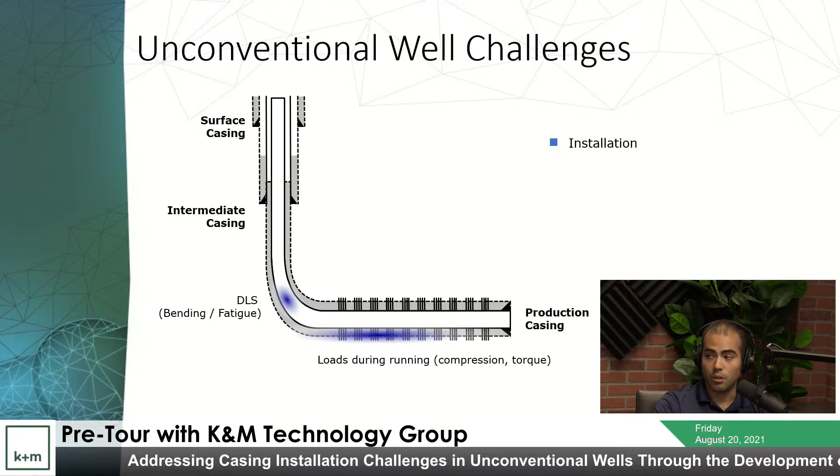As far as stimulation goes, I don't know if that's on Jorge's side. I hear clicking and stuff moving around, so I don't know which microphone is picking that up. There we go. Yep, right.

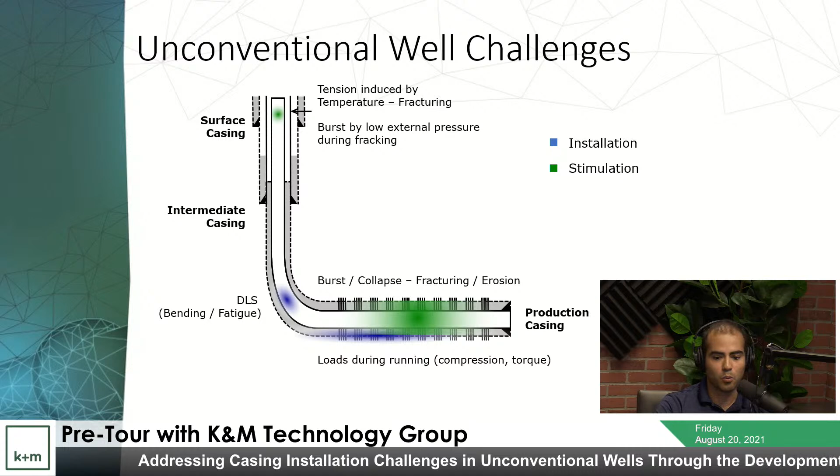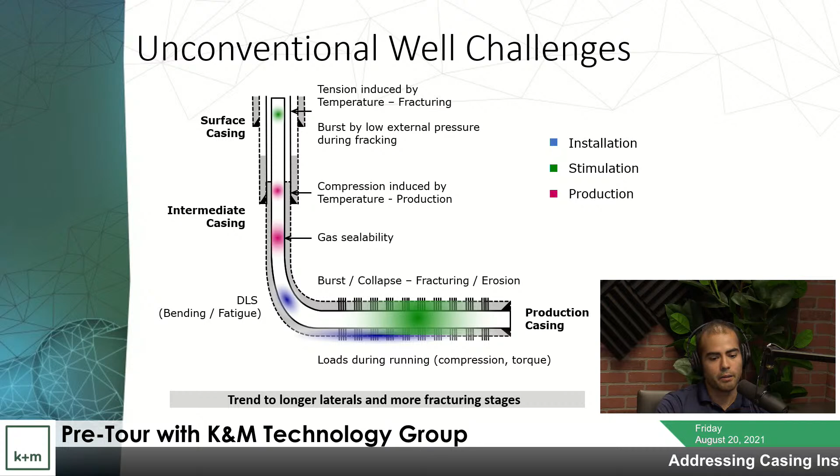During stimulation, you're dealing with various loads acting on the casing string, and as we'll see later, this is pretty demanding for the production casing. There are also other challenges specific to production. One thing that comes to mind is gas sealability as a primary concern, and this is becoming a trend in certain areas. If we think about the Rockies and what they're doing in terms of regulation and how operators are attempting to manage bradenhead pressure, we can see gas sealability is definitely a concern.

Along with all of this, you also have to deal with trends that continue to develop. One trend we're seeing, basically everybody is seeing, is the drilling of longer laterals. With longer laterals comes the need for higher torque capabilities in casing connections, an understanding of fatigue resistance if you're having to rotate to bottom, and if possible, improved fatigue resistance.

One trend we also think about is manufacturing mode-type drilling. This takes a while to explain, but for the most part it's the movement away from individual wells being drilled to pad drilling. We're seeing basically everybody, probably 90% of operators, moving towards pad drilling these cookie-cutter wells, attempting to gain efficiencies from drilling out wells on these pads using the same equipment and procedures. If we can contribute to these efficiencies, say through improved makeup times, that's something we'd like to offer the industry, and this is something we considered in developing the Wedge 400 series. And then the last point on this slide is again, sealability. It's also a trend starting to develop.

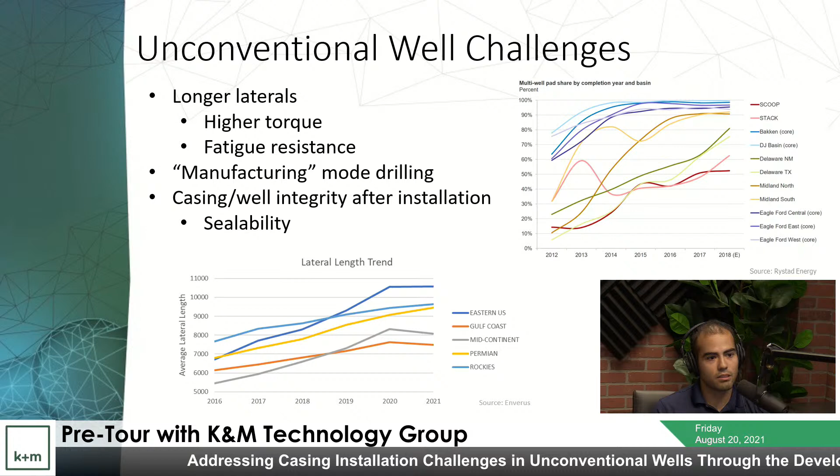It's kind of isolated to the Rockies at the moment, but we believe that in the future there's a possibility that this might start to creep into the other states of oil and gas operation.

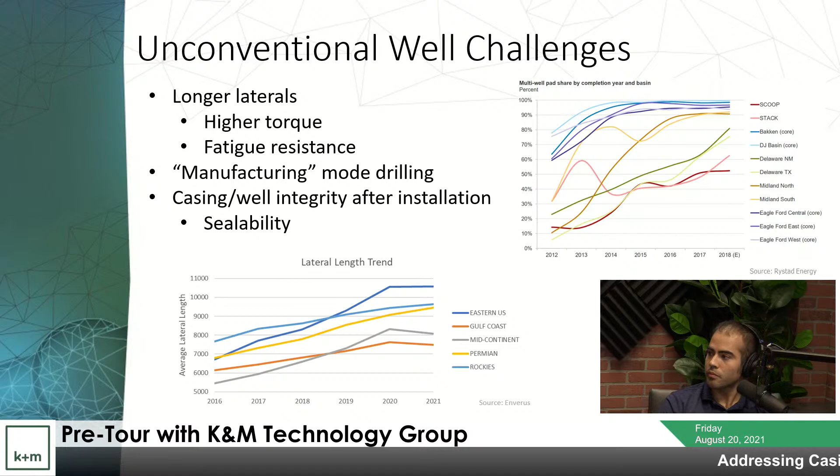Hey Lee, when you see the trend from single pad drilling to multi-pad drilling, do you also see a change in the rate or the type of casing failures that occur because of the shallow directional work?

On occasion, I would say that those are probably isolated to the initial drilling stages or period. Sure. And once they start understanding what is occurring in these areas, they kind of get a grasp of what to do in order to solve these issues.

Yeah, I think what Tim might be trying to get at is when you go from a single well pad to a multi-well pad. A single well pad, there's really no need to do any shallow directional work. You just drill straight down to your kickoff point, you build, and then you drill your lateral. And then when you start making pads, depending on the well spacing and how deep the wells are, it drives some shallow directional work just from an anti-collision standpoint.

Sure. And so even though you could have the same lateral length on the slide, you showed a couple things. You showed the move to pad drilling and then the move to longer laterals. And even with the same lateral length, when you go from straight down, building and drilling a lateral, to doing shallow directional work, that can have some severe impacts on the amount of torque required to get your casing down, and side forces and the fatigue on the casing up shallow.

So those are a couple of things that we like to take a look at when we're supporting an operator with torque and drag planning.

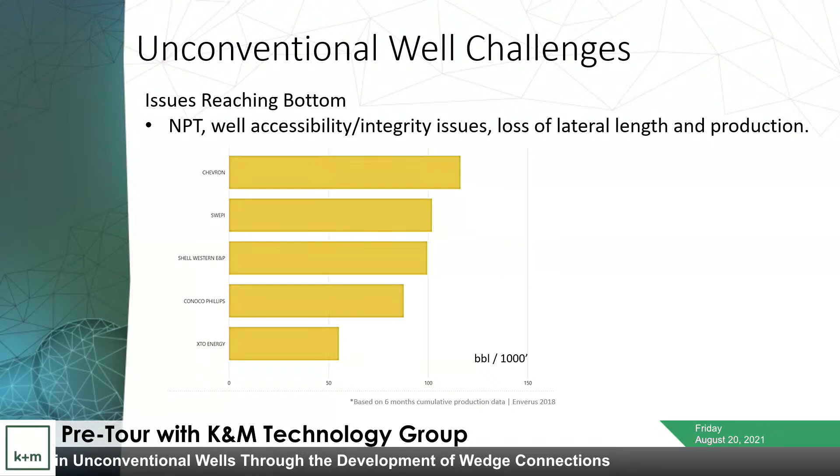Oh, one last thing I just wanted to note as far as challenges go, I think this is more of a financial challenge than anything. If you're not able to reach bottom, you're definitely going to see financial losses. If you think about how much time is spent attempting to reach bottom with casing in certain scenarios, we've seen, let's say, 6 hours, 8 hours, sometimes even 24 hours of casing being worked at in a range of like 100 to 200 feet where they're not really progressing. We consider that non-productive time.

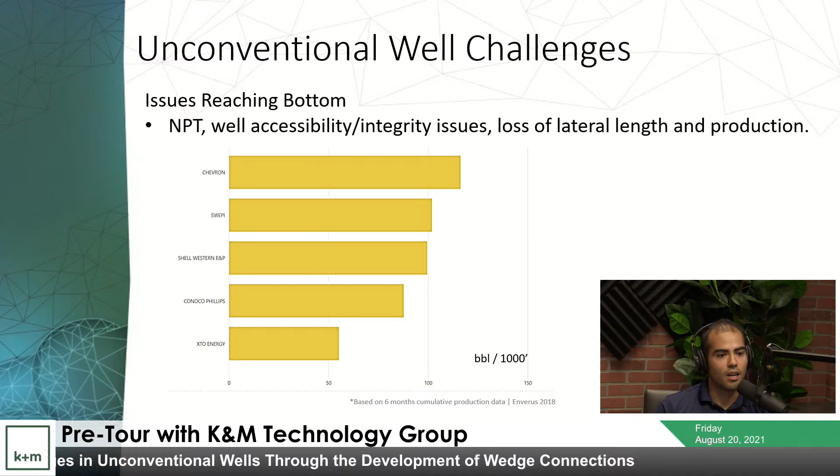You're really not making any traction, you're really not progressing with anything there. And then on top of that, if you happen to reach bottom, or let's say you call it short, if you work the casing for an extended period, you can possibly damage casing connections, and therefore have to deal with those issues later on down the road when you're attempting to complete your wells. And then finally, there's the general loss of lateral length and production that comes from having to call a well short or run short.

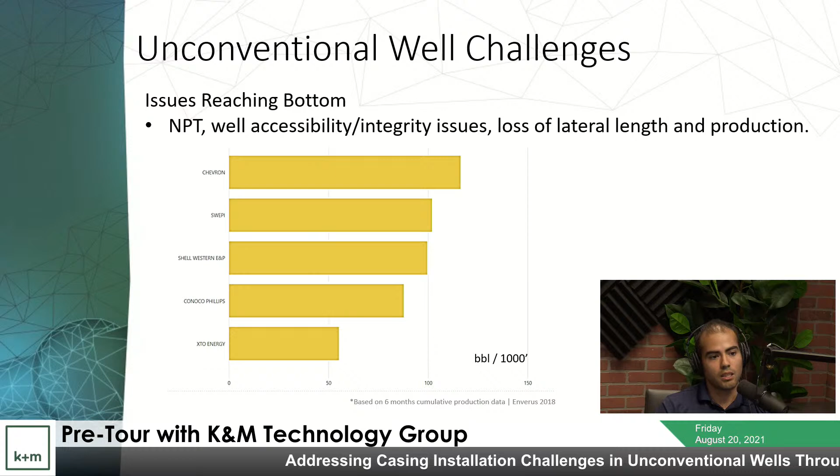We think that these are all things that need to be considered when planning and ensuring that you have enough torque to reach bottom, and just going through that planning period first to understand what to expect as you're running casing, especially the production casing in these unconventional wells.

Right, so it goes back to the whole systems design concept - it's not just getting one piece of equipment or one tubular or something, we have to look at the whole operation and be ready to take advantage of this new technology.

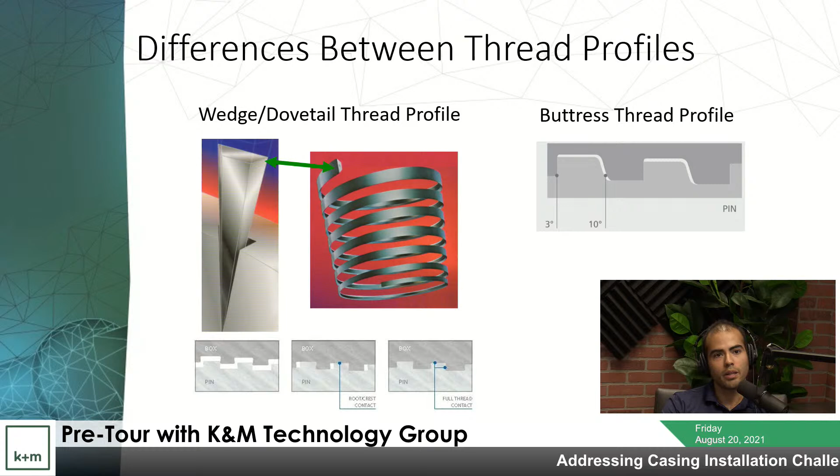Yep, and with that we can start introducing the wedge thread connection and go over the wedge thread profile, which will help us understand what these wedge connections bring to the table. Yeah, thank you Lee, I'll take up from here.

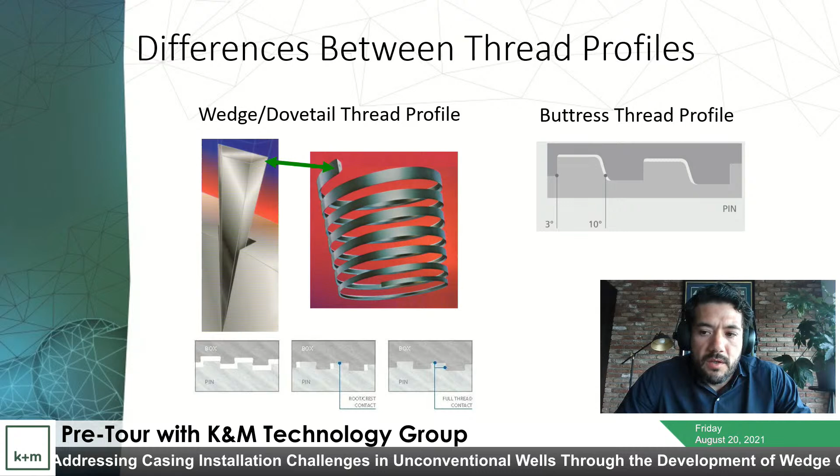Well, in this slide we can see the differences between the dovetail wedge connection and a regular buttress thread. So what we see here is a dovetail wedge shape wrapped around a steel pipe with a given taper. And the lockup mechanism of the wedge connection is as follows, shown in the lower image.

So the pin is first stabbed into the box, then we start rotating, and the first areas in contact are the roots and the crests. That's the image in the middle.

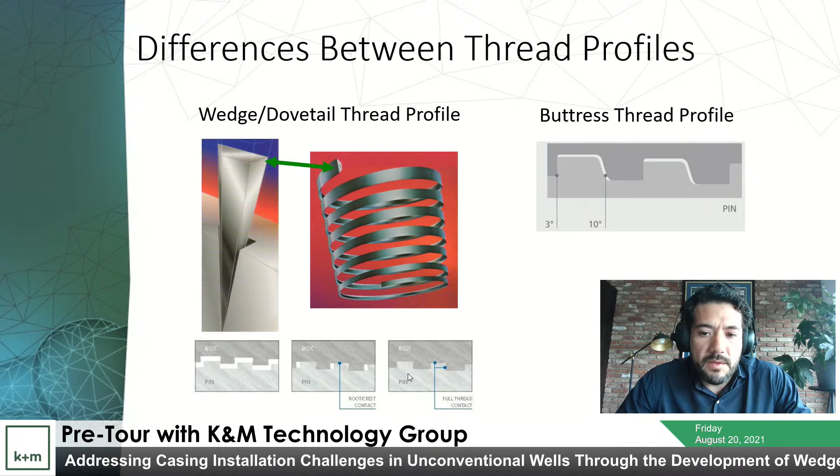Then that will increase the torque since we have to overcome some radial interference between the two pieces. Eventually with more rotation, all the gaps between the threads start to narrow and close, so we can really start to see that wedging effect.

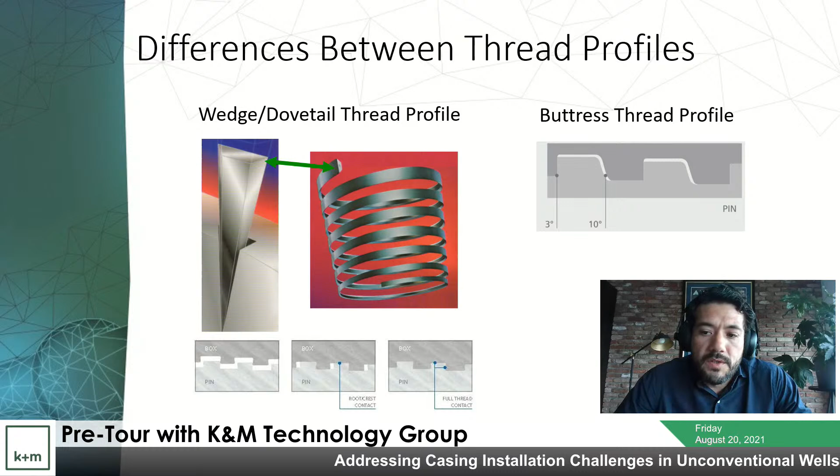It's at that moment that all the surfaces are in contact, the roots with the crests and the flanks. This final position gives the connection the ability to seal, the thread sealability, and also the resistance to torque.

From this point on, it's really hard to make the connection move any further. This is different from what happens in a regular buttress thread profile, because most of the energy stored in the connection at makeup comes mainly from radial interference, which needs to be fairly high if we want an acceptable level of sealability and torque. Regardless, there will always be gaps between the threads.

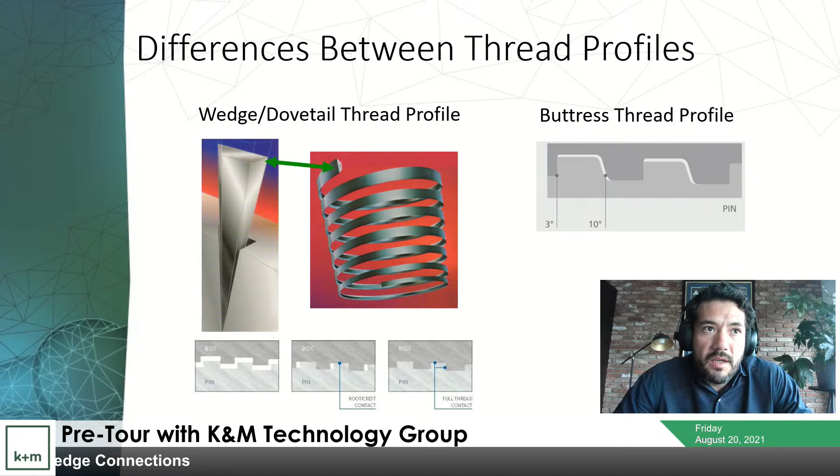In this case, the buttress, well, it's easier to rotate the connection. If you try to rotate it a little bit further, it will move, which in turn will overstress the connection, or in this case, the coupling radially.

So this is basically, you can see from a side profile, it's got the dovetail, and then it's a wedge also. So this would be the pin, this would be the box. You can see that when you start making it up, there's a lot of play. Then as you continue to push it in, eventually it locks up and you're getting full contact across there. That's what the slides were showing.

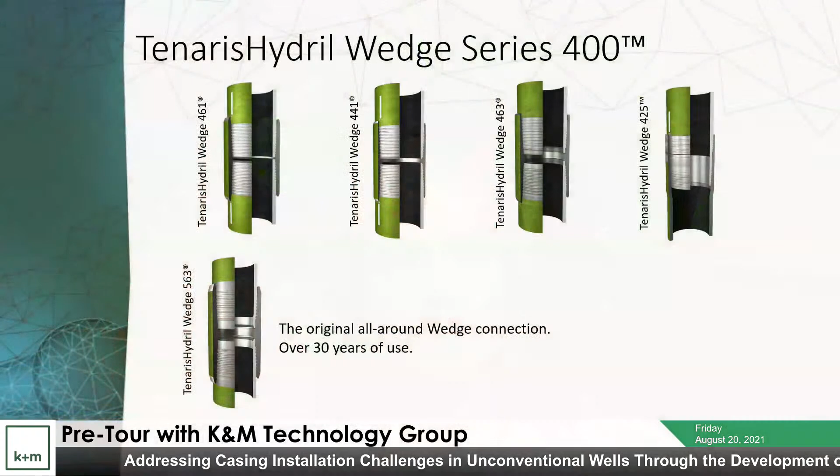All right, now we can start detailing the Wedge 400 series here. We have four connections that were recently introduced to the market, starting with the first connection of this family being the Wedge 461, and this is your standard all-purpose wedge connection.

It's being used all across the U.S. nowadays since it's been introduced. It does not have a metal-to-metal seal. It's a full-size coupling. The interesting thing with this particular connection is that as you are making it up, you are going to engage the wedge threads in order to achieve a significant level of torque.

As you are installing casing and reaching the operating torque of the connection, you can see an engagement of the pins come in contact, and this is just an additional mechanism to allow for additional torque abilities for this particular connection. We also introduced the Wedge 441, which is very similar to the 461.

The thing that makes this particular connection different is that we developed a coupling that is extremely slim. In fact, the OD of this coupling is comparable to our wedge integral semi-flush connections. So when you see this connection up close and personal, you can see that the coupling is barely above the OD of the pipe body.

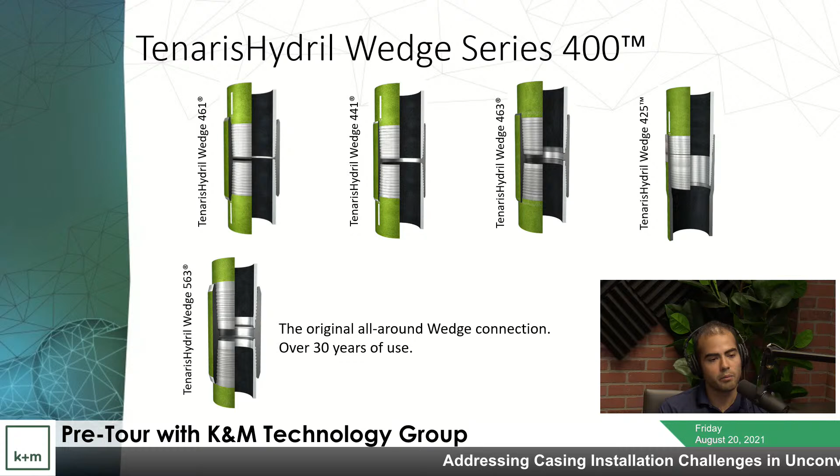So from a client standpoint, is the advantage cost or production time or what? A little bit of both. In terms of costs, we like to think that we are passing along some of these costs that we gain in terms of efficiencies.

But we find that having a coupling, you also gain other benefits. Typically, when you compare the fatigue resistance of various connections, threaded and coupled connections tend to have the higher fatigue resistance in comparison to the other extreme being a flush connection. And you have some flexibility too, that if you damage or misthread the coupling, you can just get another coupling.

Sure, and not have to trash that entire joint. So, okay, sure, exactly, yeah.

The other thing as well is that the straightening belt in the middle helps to control the hoop stresses that happen at the very beginning of the thread, which also helps to improve the sealability of such a really thin box.

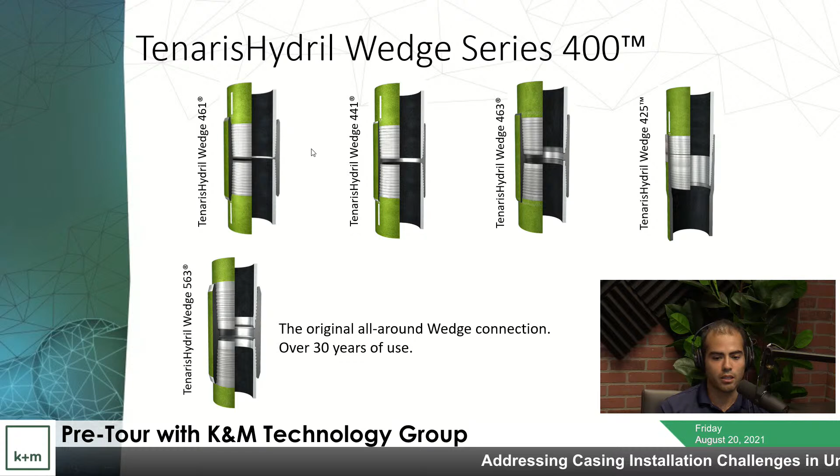And then we have the 463 connection. It's comparable to the 461, except that we've added a metal-to-metal seal, in order to provide gas-tight sealability to a very high level. This connection also has a shoulder that you can engage with at higher torque levels. And then we have the 425, which is an integral two-step wedge connection with a metal-to-metal seal at the center of the connection.

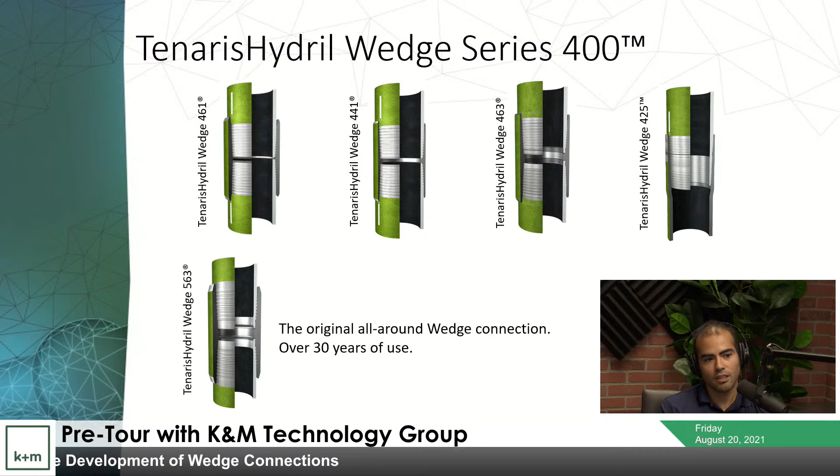And all of these connections, you can kind of pull at their roots and find that they all used some form of technology from the original Wedge 500 series connections, especially the Wedge 563, which is probably the connection that most people are familiar with if they've used Wedge connections. It's been around for a significant amount of time, used all across the world for all kinds of applications, including unconventionals. In fact, we have some operators that are still familiar with it and haven't migrated over to one of these 400 series connections, because they understand that the 563 is a pretty good connection, and sometimes it's difficult to fix something that isn't broken.

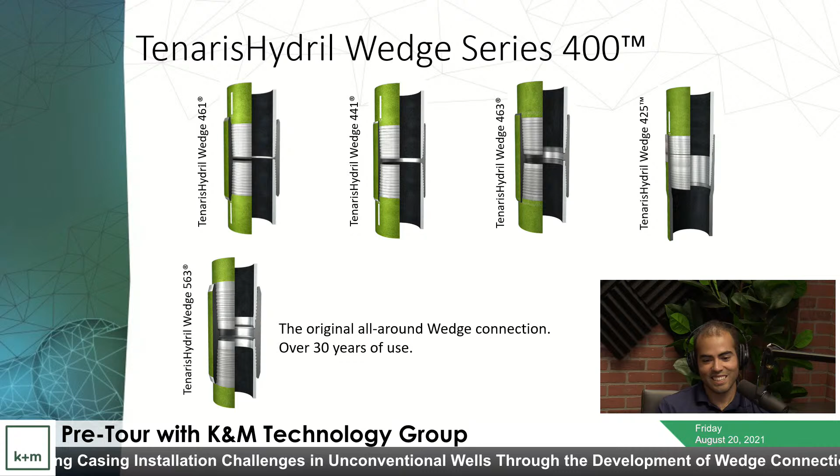Let's talk about the naming structure for a minute, because back when it used to be simple, it used to be pretty simple. Keep it on this slide for a minute, because I just want to point out the different numbers.

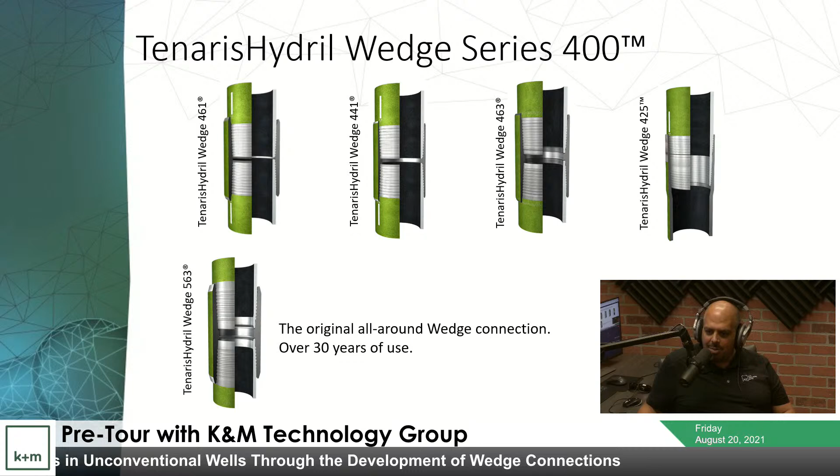So there are three different numbers after 'wedge.' It used to be that 5 signified that it was a wedge thread, 6 was threaded and coupled, 3 was semi-flush, and 1 was flush. And then there was either a 3 or a 1 at the end, with 3 being gas tight and 1 not being gas tight. So it was a pretty simple naming structure.

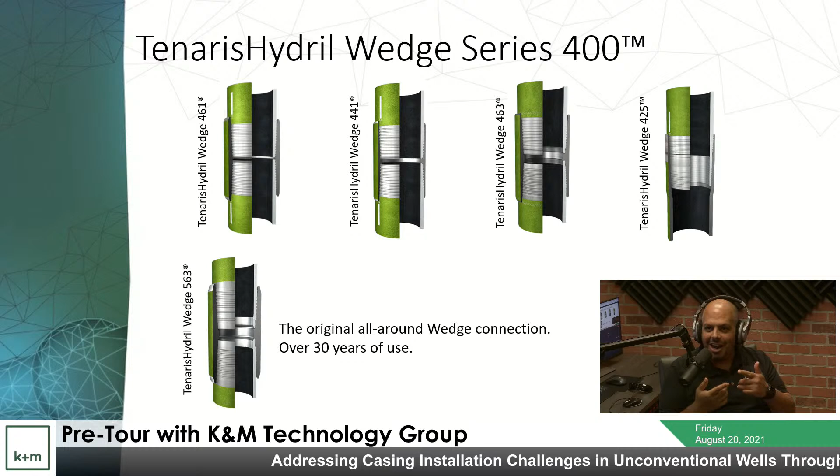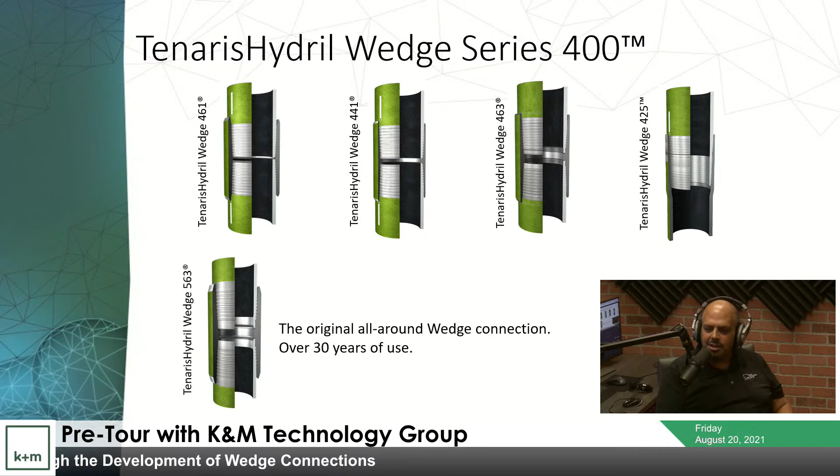Sure, now I get confused because it's not just the 5 anymore. I believe you have the 6 series also. Yes, now you have the 4 series, and then 6, 4, 2, which didn't exist before. And also there's 1, 3, and now a 5 also, which didn't exist before. So can you just walk us through the naming? Sure, maybe Jorge wants to take this one.

The naming, like you said, in the 500 series was pretty simple. After the 500 series, we deployed the 600 series that really didn't follow the same nomenclature, let's say.

For instance, 6 is the number of the series. The 1 is still flush, the 2 is a semi-flush connection. And then, because we added features, we kind of started coming up with new numbers and new nomenclatures, but it really didn't track back to the original S500 nomenclature.

Now for series 400, we try to go back to that. So 4 is a semi-premium series mainly for unconventionals. Then the digit in the middle is close to what would be in the Series 500, so 6 is for thread and coupled connections.

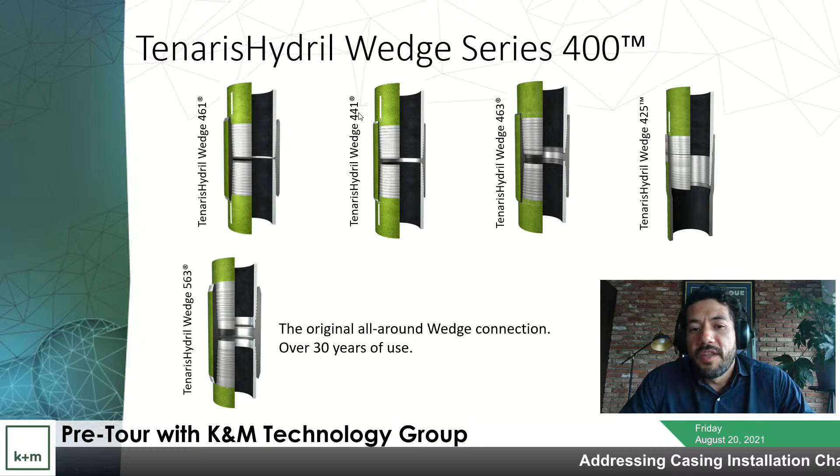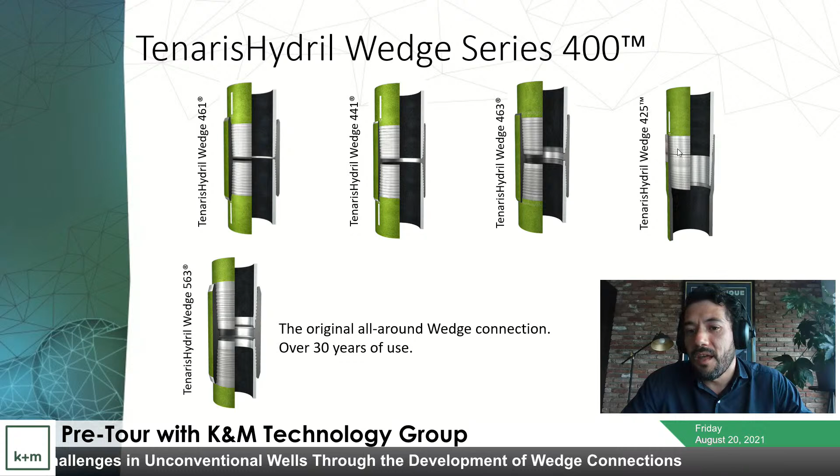Now, in this case, the 2 is for an integral connection, and the 4 is for a thread and coupled but slim line or slim coupling connection. The digit at the end is 1 for non-gas tight or without a metal-to-metal seal, and 3 is for a metal-to-metal seal. Whereas with the 5, it's a connection that has 2 steps with a seal in the middle—that's also gas tight, but the seal is found in the middle between the two wedge steps.

Okay, all right, are these all similar in terms of makeup time and makeup complexity? In terms of makeup time, I would say that these connections were designed with the intent of minimizing the amount of time required to make up a connection.

In fact, we've measured the amount of time it takes to make up these connections and compared them against our own buttress-compatible semi-premium connection, TXP, and we found that these connections are saving a significant amount of time on the rig floor. If you think about the trend towards longer laterals, you're having to make up more pipe, spending more time making up casing, and if you can minimize that time, I think it's pretty important.

So between the different types of connections, are they close in makeup time, or are certain ones faster or slower than others? I would say the threaded and coupled ones are pretty close to each other, with the 425 being a little different. But you still get a pretty good deep stab with the connection, and we try to minimize the amount of turns until final makeup.

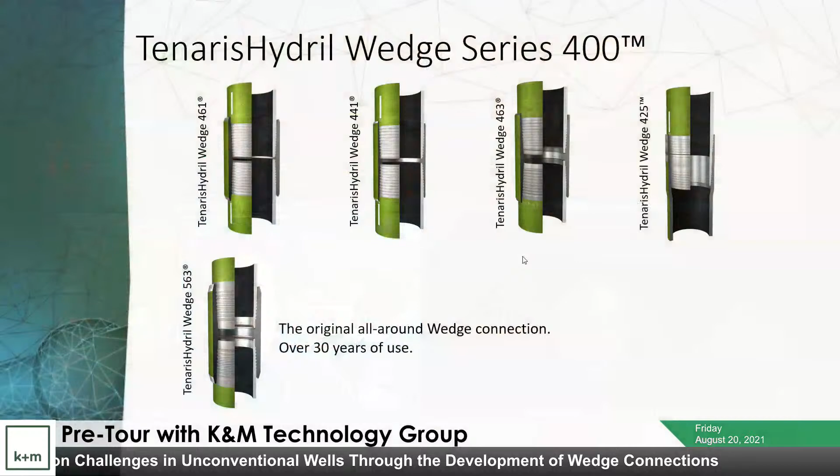So if you don't necessarily need a metal-to-metal seal, but you would like to have as much torque to work with, the 461 is an awesome connection for that.

One thing I don't know if Jorge misspoke or if I misunderstood, but I'm almost positive he described the 400 series as a semi-premium connection.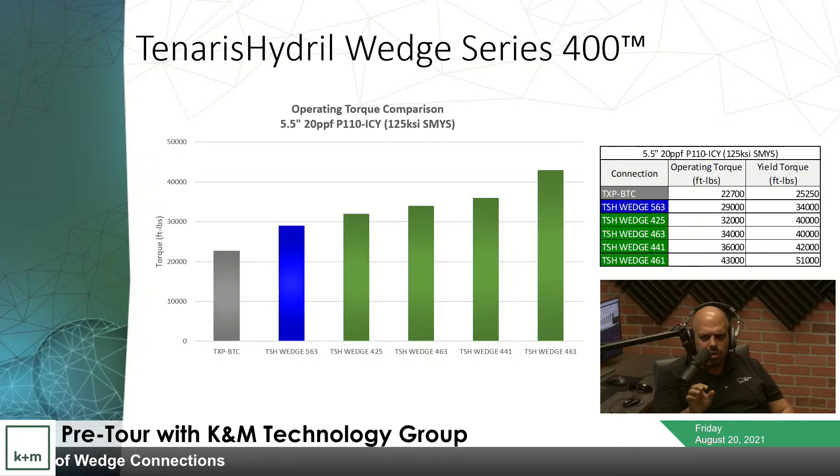We don't necessarily want to compare it to premium connections like what you're seeing in the 600 series. The 600 series introduces a significant amount of connection technology which maintains that premium tag. These connections are also premium in that you have a significant departure from what would be considered semi-premium in the oil and gas industry, which typically highlights only buttress-compatible connections.

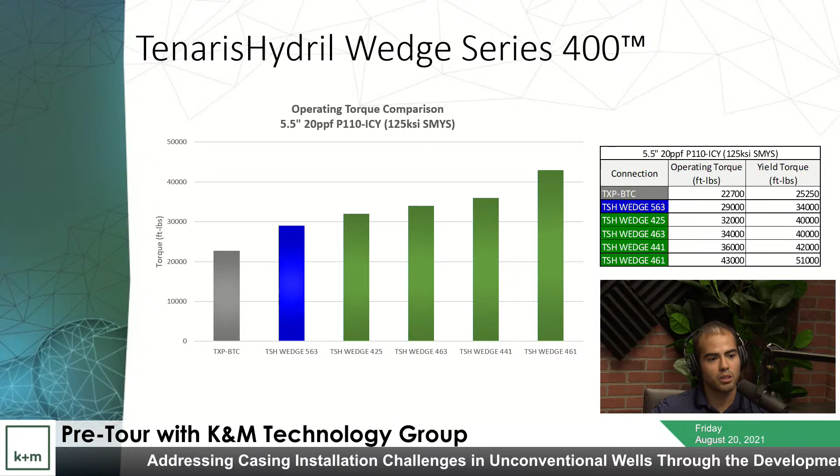But these connections kind of play along that line of premium, semi-premium, although you have a premium thread profile and premium metal-to-metal seals. We don't want to compare these against our 600 series, which again has all this additional technology testing that goes into it. So it's kind of a gray area, I would say, more than anything.

The 563 was like the Lamborghini of connections for a really long time.

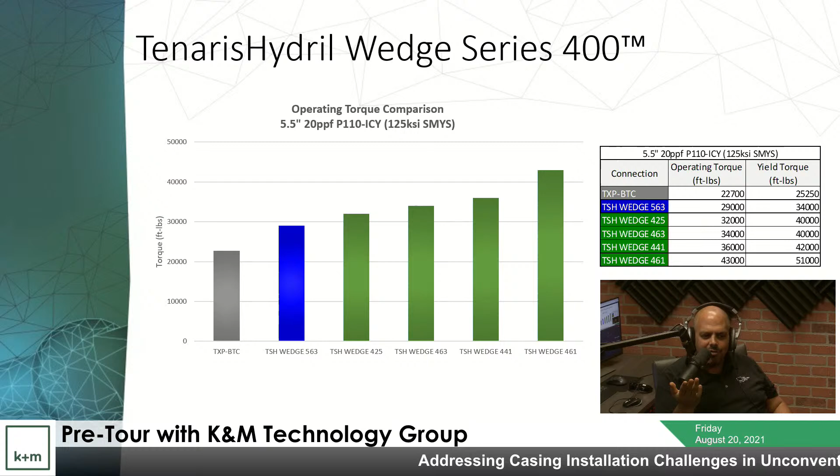So is the 563 now in Tenaris's eye a semi-premium connection? No, it's still a premium connection. It's still a flagship connection. It's still recognized. I don't want to say we don't advertise it as much anymore, but it's still recognized all around the world as a premier connection.

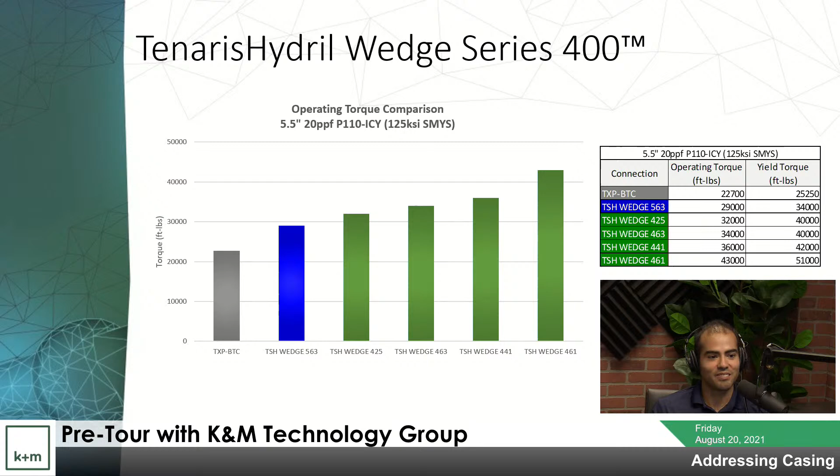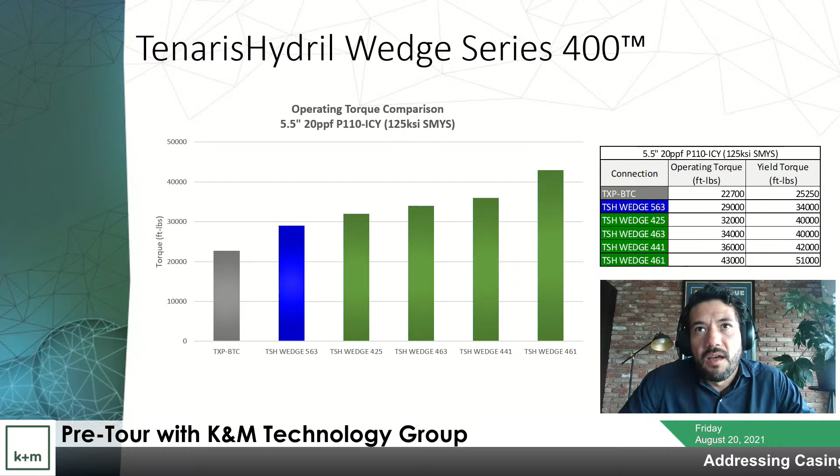Let me step in here. The 500 series is a really, really good connection, and you have to remember this connection was born, if I'm not wrong, like 1986. So it was very good. It proved to be very good, and it has thread profile features and sealability characteristics that make it a premium connection compared to the 400 series.

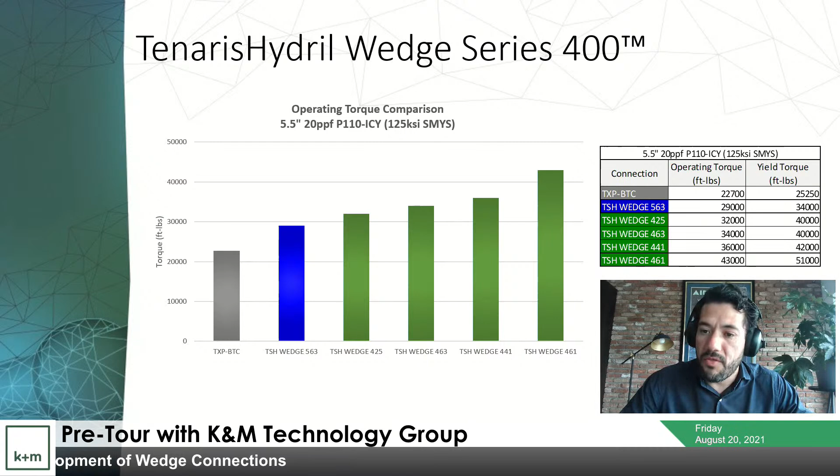One might consider comparing 563 versus 463. There are reasons why we cannot go further in torque with the 563 because we would compromise sealability, whereas with the 463 we can. But there are other things that are better in the 563 compared to the 463, and of course the manufacturing time and all these things already built into the connection would be very hard to replicate.

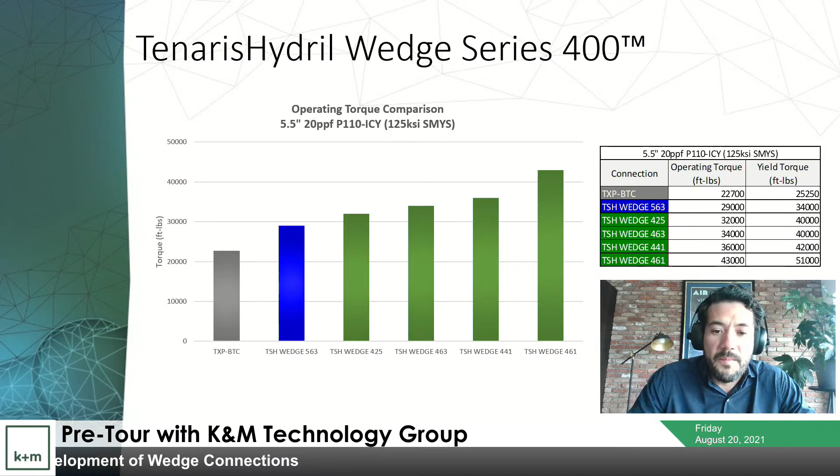Just out of curiosity, how long did it take from the time somebody at Tenaris said, let's make a new connection, until you are in full production mode? Wow, that's a tough question. I would say it really depends, but somewhere between 4 to 6 months, probably, maybe more, 8 months.

It takes some time really, I'm going to go through it a little bit more in detail, but it's a process, and there's a lot of interaction, especially for a company like ours that is pretty big in terms of manufacturing capabilities, and it involves a lot of logistics.

Just to give you an example, we only design the wedge connections in Houston. From there, all the manufacturing is done in Mexico, and the testing sometimes is done in Mexico, Argentina, or Italy, depending on the testing capacities we have in each location. So as you can imagine, making a piece of metal travel from one country to another is complicated.

So yeah, it really changes. Do all the wedge connections have the dovetail as an integral part, because you can have a wedge without a dovetail? So do all of them include a dovetail? Yes, our connections do. There are some other connections from other players that have the wedge effect, but with different profiles, not necessarily a dovetail.

So here I'm going to go through a little bit of the design process. For us, the design process starts with the input we gather from our technical department and their conversations with the operators and their requirements. Saying it another way, it's where they spot there is a gap between what they need and what is available to fulfill those needs.

With that input, we go straight to the drawing board and start working on several concepts. In the conceptual design phase, we start with a blank pipe. Let's say we only define the size, the wall thickness, and the steel grade. From there, we start mixing profiles, the shapes, the tapers, the thread lengths, and all the other features, seals, if they have seals. Then we do all the geometrical and mechanical verifications to make sure the structural integrity of the joint will comply with what was established at the beginning.

To do that, we use the finite element method. That is what you see on the screen. Basically, that is a mathematical approximation to assess the mechanical behavior of a structure subjected to working loads, whatever those loads are. It is a methodology widely used in all major industries, really from anything, from aerospace to toys. It's everything. And of course, oil and gas is not the exception. So what we evaluate with finite element analysis is axial loads, pressure loads, torque loads, and all the combinations between them, and how the connection responds to that.

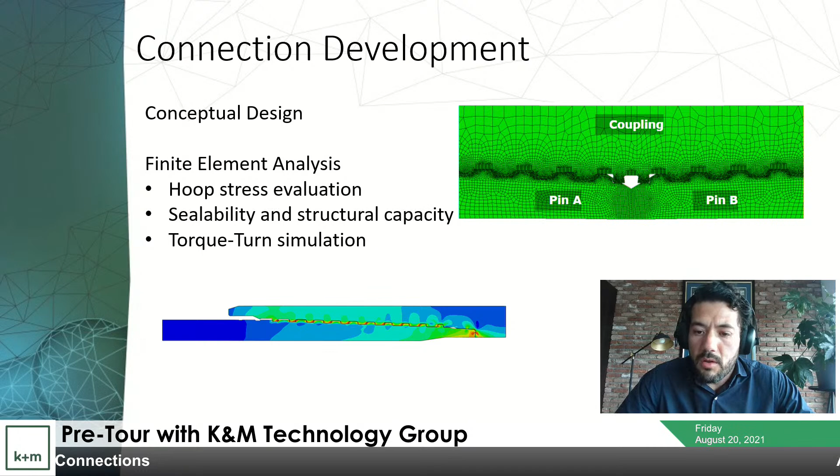But for instance, we also evaluate hoop stresses. Hoop stress is certainly a concern, because especially in environments where low to moderate concentrations of acidic gases may play a role, it could cause cracking, like hydrogen sulfide.

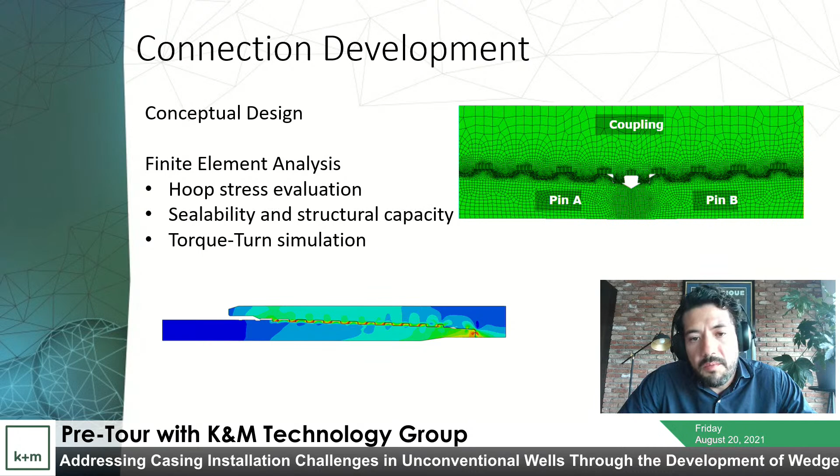So once we finish with all the mechanical computing work and all the design is optimized both geometrically and mechanically, we move on to the physical full-scale testing part.

Here is an example of what is a test for non-conventional connections. There is not a standard protocol for testing connections used in the shales, like there is, for example, in conventional plays, or for those familiar with the API 5C5 standard. So we came up with our own protocol in an attempt to simulate the actual conditions under which the connection will be used, and also trying to mimic the sequence of those conditions.

This full scale testing that you're seeing here is again a Wedge 461, 5.5, 23 pounds, P110. The first two portions are installation loads. We start first with side A of the connection, made up to reproduce the conditions of assembly in the mill. Then side B, we do that to reproduce the conditions of assembly in the field. We also change the doping conditions between side A and side B, basically to account for the differences between the manufacturing process inside the mill and the manual doping procedures in the field.

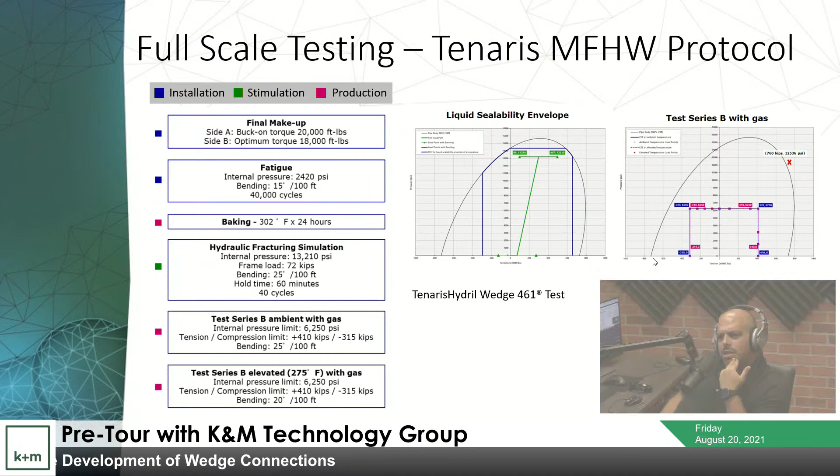How often are these tests conducted? Is it once during the development of the connection, or once per lot, or once per order?

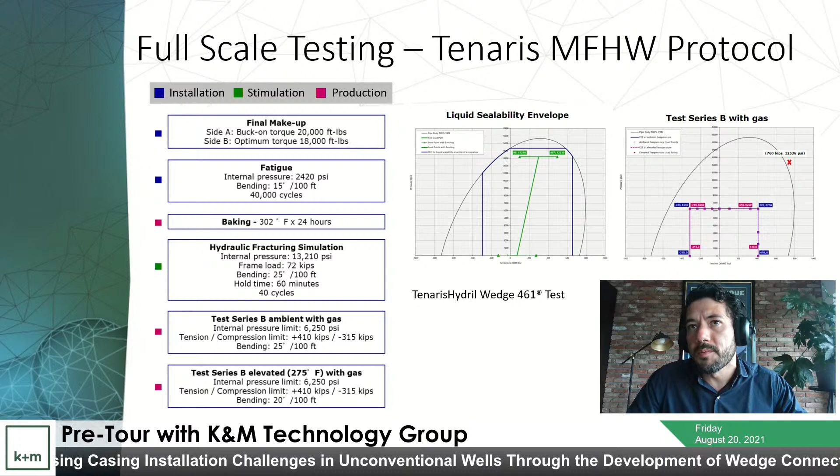No, during the development phase we definitely test them and validate. And that's also an important part you mentioned: these connections are designed in families, or ranges of families. For instance, a 5.5 461 will be completely interchangeable between a 5.5 17 pounds per foot up to a 5.5 26 pounds per foot.

So what we evaluate is, because resources are limited, we want to validate what is mostly used. In this case, we would test the 5.5 20 and the 5.5 23, and from there extrapolate to the other sizes. We do the same for 4.5, which is also interchangeable within a certain range, and for 6 and 7 the same. So to answer your question, we do that only during the development phase.

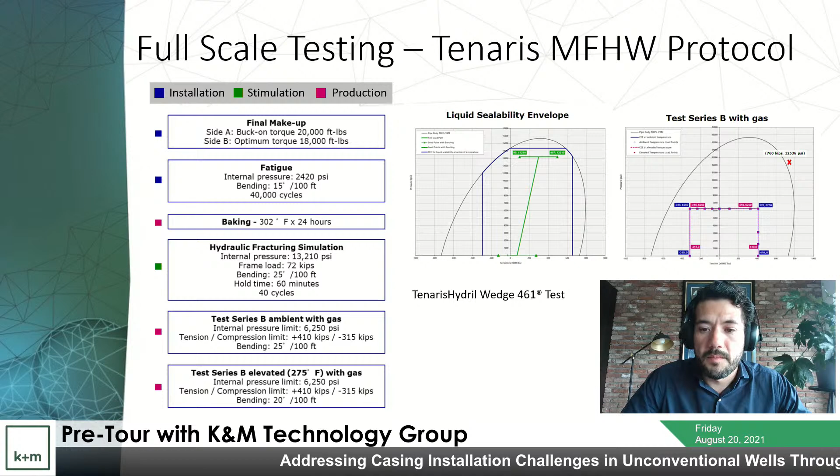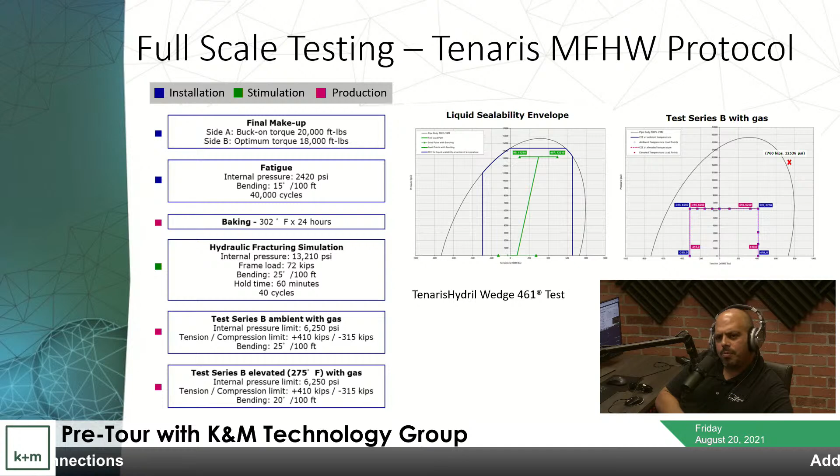On the hydraulic fracturing side, where it says 40 cycles, if you assume 200 feet between stages, 40 cycles would be an 8,000 foot lateral, which right now is pretty common to go up to 10,000 or even above. So if an operator is drilling 10,000 foot or longer laterals and wants to test it to more than 40 cycles, say 60 or 80 cycles, what would that entail?

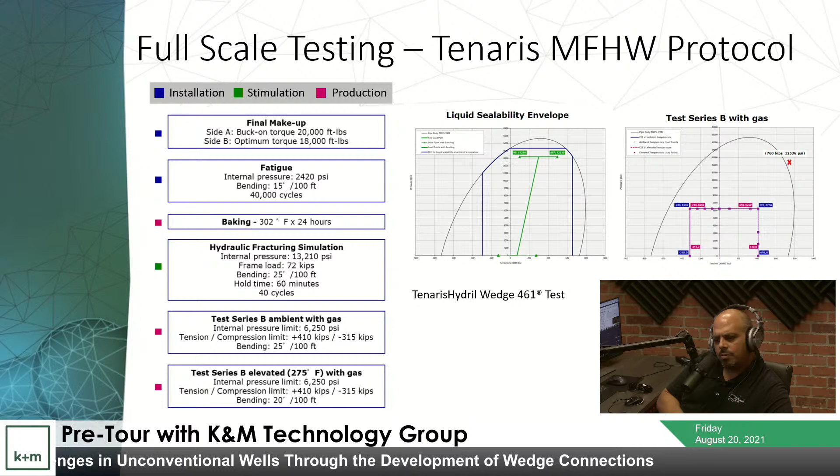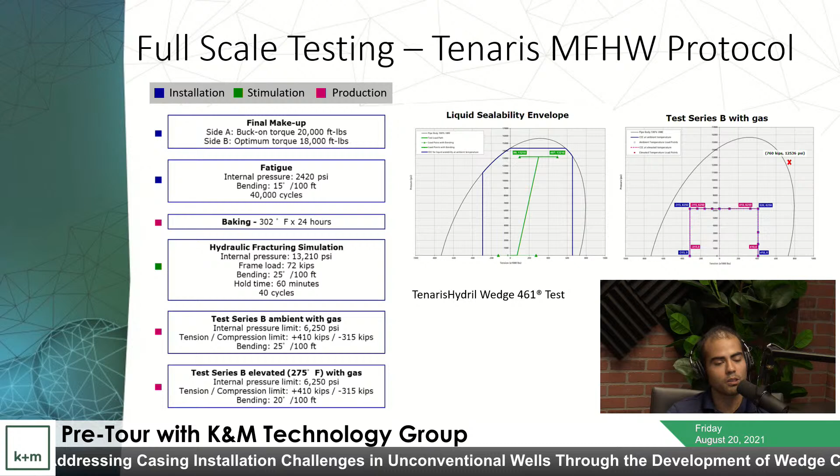This would start an internal discussion to determine whether there is an opportunity for Tenaris in testing the connection. There have been occasions where an operator requested testing specific to their application, and at the end of the day it's just a matter of who's going to pay for that testing. As Jorge commented, these tests are sometimes difficult to schedule with everything going on, so we typically plan which connections will be tested in the following budget year, and it's difficult to just squeeze something in.

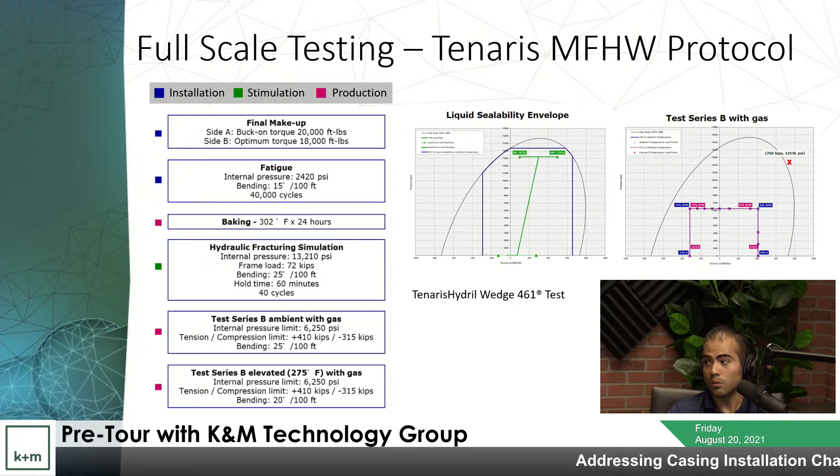But if there's an opportunity there, and we can come to an agreement with the operator, we'll go ahead and test it to whatever requirements they're asking us to.

Another important part of the connection validation is fatigue testing. To give a brief overview, fatigue can be thought of as the modification of mechanical properties due to repeated stresses or cycles of loads.

With this test, we want to study how the nucleation of cracks occurs, whether it's due to manufacturing defects or stress concentrators we haven't seen during the design phase. We also study how that crack propagates and how much time it takes to propagate until failure, which we can see as a through-wall crack in the pipe.

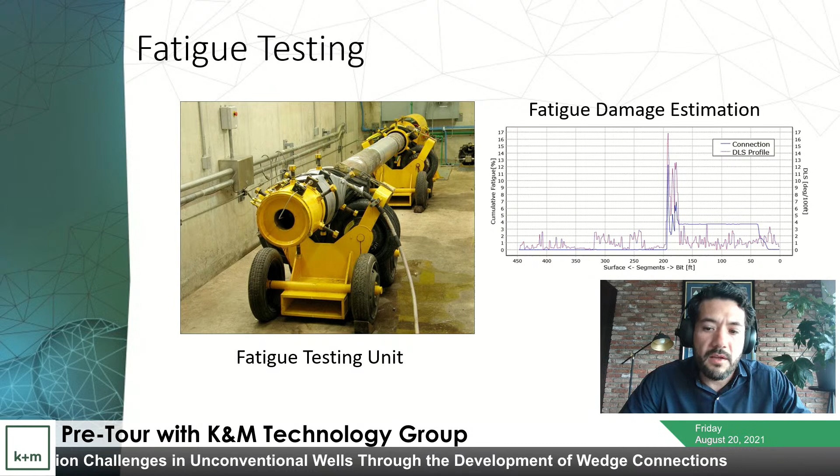Most importantly, what we can extract from these tests is a graphical representation of the connection's response to cyclic loading, what we call the SN curve. This curve allows us to correlate the level of cyclic stress to the number of cycles we would expect a connection to withstand before failing.

This is particularly important if we're doing a well design, or if we want to select a connection based on certain given conditions that an operator may have in their wells. It also feeds models of torque and drag and fatigue analysis, to make sure we will always be on the safe side.

Doing this evaluation in the lab is very important, and it's especially nice because everything is clean and tidy, and you can measure and control. But nothing compares to, and nothing beats, reality. In our case, that reality is the Rig Direct Academy, a facility we have access to in Mexico.

What we do there is go to the mill, since it's right there, and take stock connections coming directly from the mill to test them under various conditions. We use tongs, we use CRTs, we change the doping conditions, we use drilling mud as a lubricant instead of dope, we use low and high RPM, or misalignments, or any kind of test we want to do. The images on the slide, for instance, were conditions requested by a customer, but these are not situations we would advise in actual field operations.

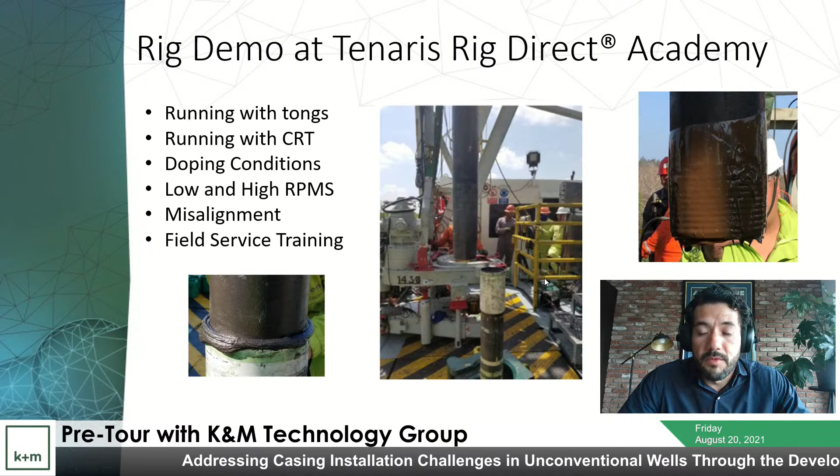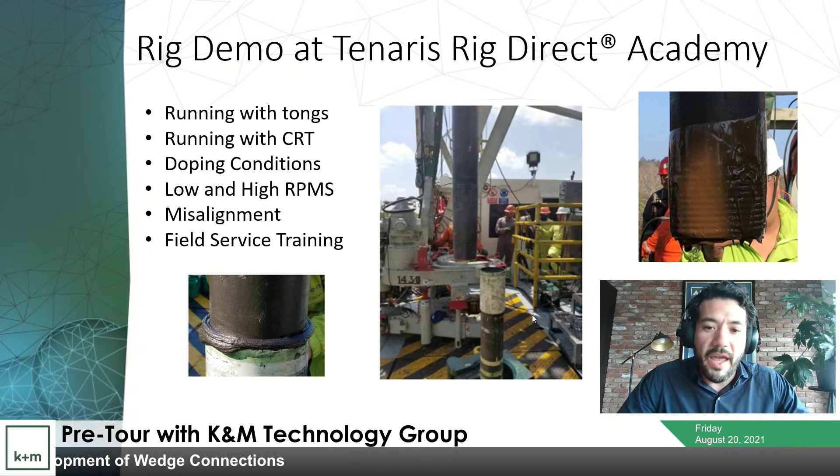The last point, which is really important, is training our field services personnel. This is especially relevant when we're deploying new products or products being released to the market, like the Series 400. The facility overall is very versatile because we can organize demos for internal personnel, customers, or operators, but we can also perform failure analysis that we can't do in the lab, or any other type of study. This is very nice to have for connection development.

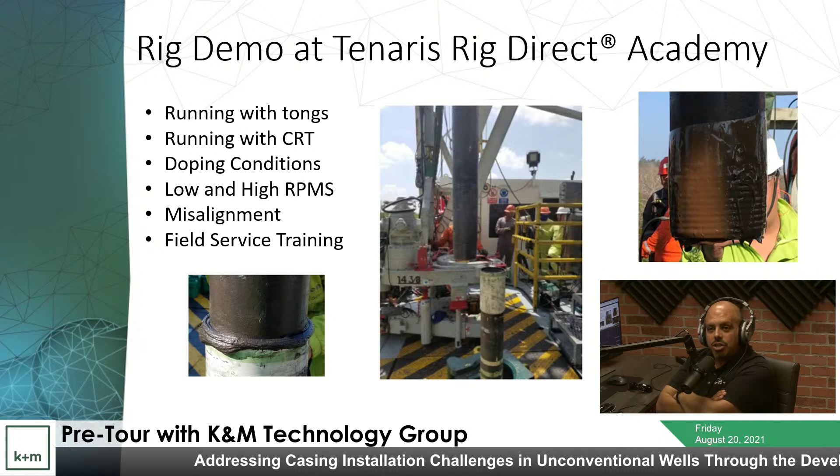There was a question about insights or recommendations, since you test low and high RPM and different doping conditions. What would be considered ideal as far as RPM while making up, and types of dope to apply, so there's a running manual defining the optimal conditions for making up these particular connections?

If I recall correctly, typically what you're seeing is a high and a low RPM that we'd like operators to apply. During the initial turns, prior to seeing the higher torque levels, you may be making up the connection around 20 RPM, then you may see a reduction down to 10 or 5, depending on the connection. As far as doping conditions go, you really want a good, thin layer of dope around it.

Nothing like what we see in this image, where we decided to just pack on the dope and see how the connection would respond. Fortunately, what we saw is that it's very robust across all of these conditions. In fact, I was on location at the Rig Direct Academy, and I believe I took some of these photos. We ended up getting pretty aggressive with the connection just to see how it would respond, and fortunately it did things that were pretty impressive to me.

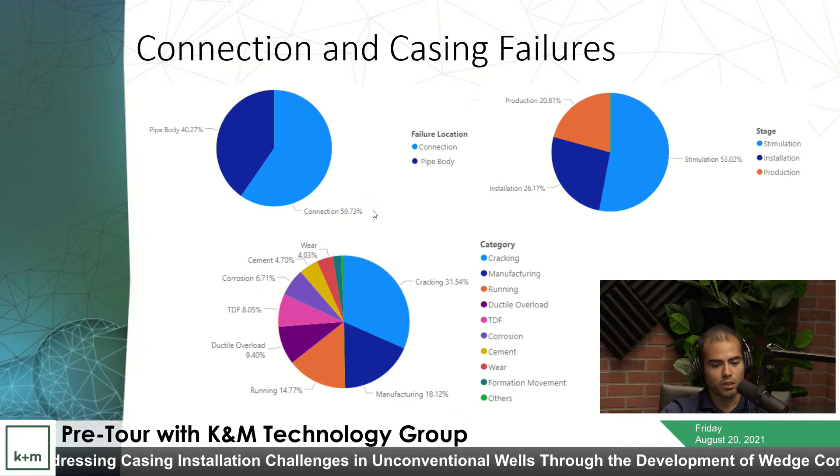It looks like we have a little bit of time here, so I'll go pretty quick through some of these statistics we recently published, gathered in an internal database fed through failures that occurred on our pipe, but also failures on third-party pipe, where operators were willing to share details of the failures they had, allowing us to see the failure mechanisms. Obviously if it happened on our pipe, we have pretty good visibility as to what occurred. But just to give you a couple of numbers, what we found was that about 60% of all failures were occurring on the connection of the casing, and about 40% were occurring on the pipe body.

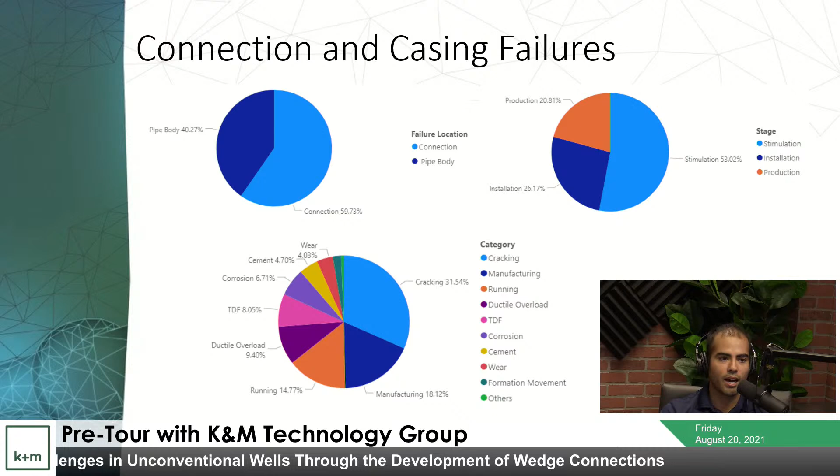Then we decided to see when these failures are occurring. About 53% of all failures occur during stimulation, which is understandable, since that's probably the worst case scenario the pipe will see, with extremely high pressures and the introduction of cold fluid. So at that point you'd expect to see a failure if things were to go bad, or at least at a higher percentage. Then about 26% occurred during installation - this is at the time of makeup and during running. And then about 20% occurred during production.

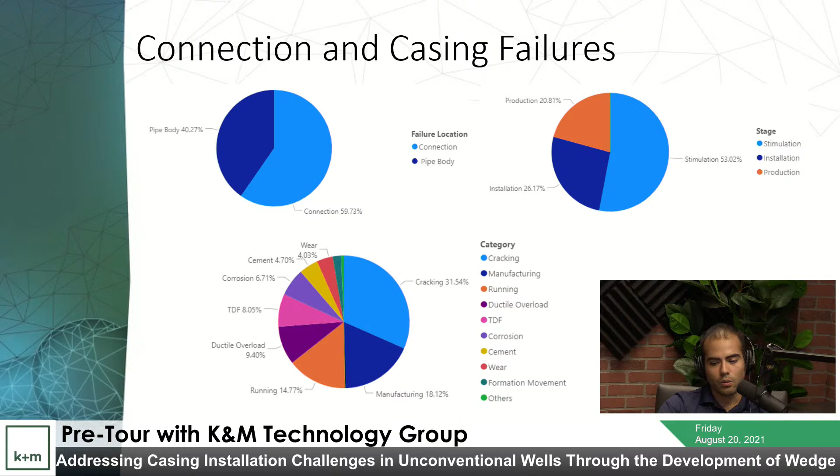Then if we attempt to understand the cause, we find that about 31 to 32% was a result of cracking. This can be environmentally assisted cracking, such as sulfide stress cracking or hydrogen embrittlement, where you'd end up seeing a cracked coupling. Manufacturing was also pretty high in terms of percentage here - this is some transparency Tenaris is providing, but also, again, this includes pipe not produced by Tenaris, just information we received from various operators who picked up a conversation with us after having a couple of issues - that's about 18%.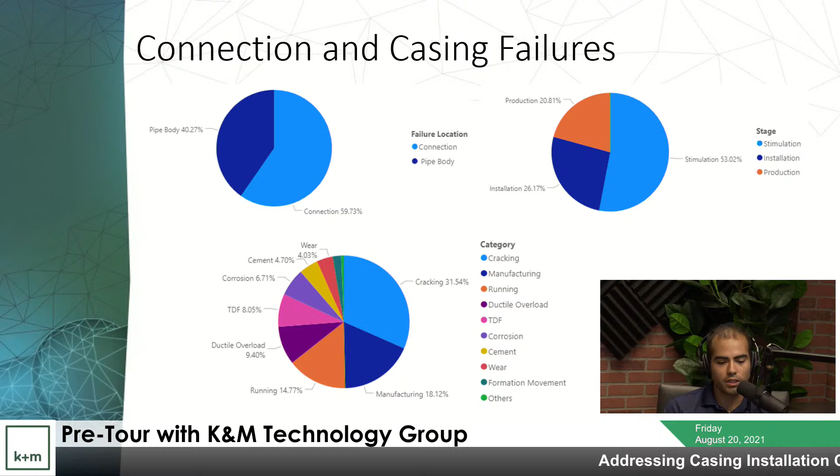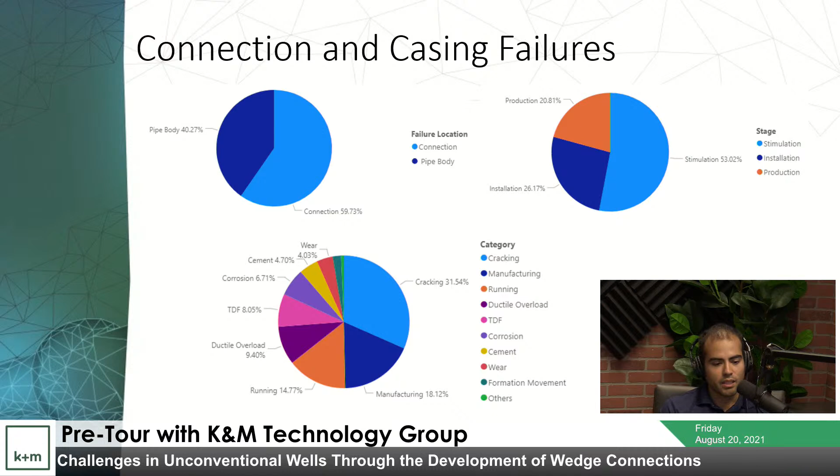14% was due to running issues, whether you're seeing cross-threading, no shoulders on connections, poor torque turn plots, and then it continues with some percentages that are relatively small: 9% for ductile overload, 8% for torque drag and fatigue - this is over-torquing during running or seeing a fatigue failure due to an extreme amount of cycles generated as a result of having to rotate the casing to bottom. About 7% for corrosion, 5% for cementing issues. This includes poor placement of cement or having uncemented sections that might see trapped annular pressure.

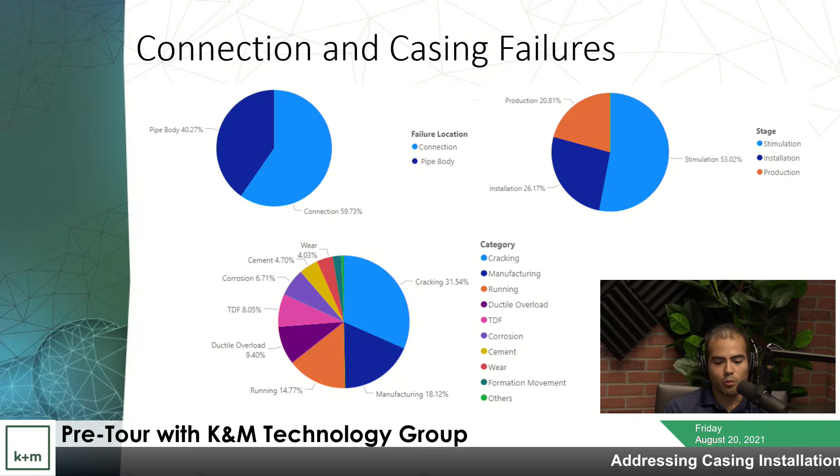And then we also have wear, formation, movement, and others, making up about 8%. I think the most interesting thing for me on that is that 53% happens during stimulation, but I suspect that a lot of that damage occurred during the installation phase.

So if you're not planning for wellbore instability, you're not planning for your hole cleaning plan, and you're not training your crews on how to run the casing, and it's normal in a horizontal well for the casing not to want to go to bottom. Sure, gravity does that to us, and if you don't have that pre-planned and taken into account for, then somebody's going to get cowboy with it and start working that pipe.

Yeah, and they will get it to bottom. And I mean, there's a famous picture that goes around that shows a wellhead upside down in the cab of a fracking truck because it was buttress pipe, and they worked the crap out of it, and they got it to bottom, and then they hit it with 15,000 psi, and shockingly, it blew up.

So, yeah, I think another interesting thing in that slide is that more than half of the casing failures are the connection, not the pipe body.

Because when we focus on casing design, we go through all these different load tests and whatnot, and we come up with - is it sour service or not? And we come up with a grade and a tensile strength and everything is focused on the pipe body. And we just use whatever, and then connections, when we select a connection, it's just like, well, what kind of torque do I need to get it down? Does this connection provide that torque? Done. That's 90% of the engineering.

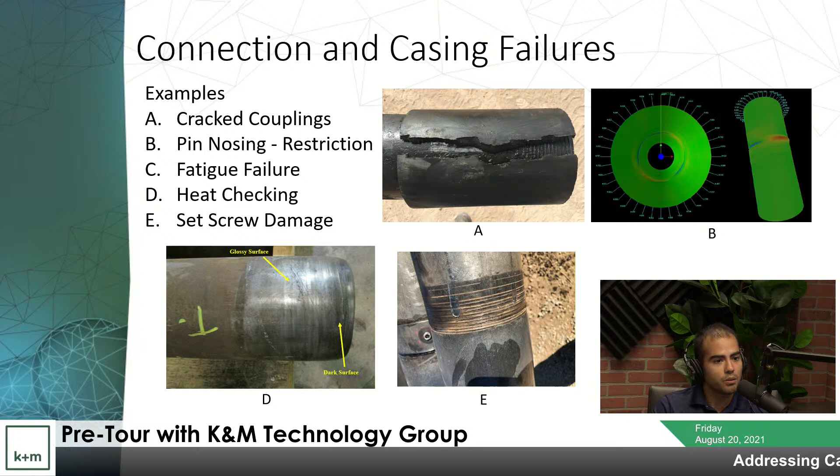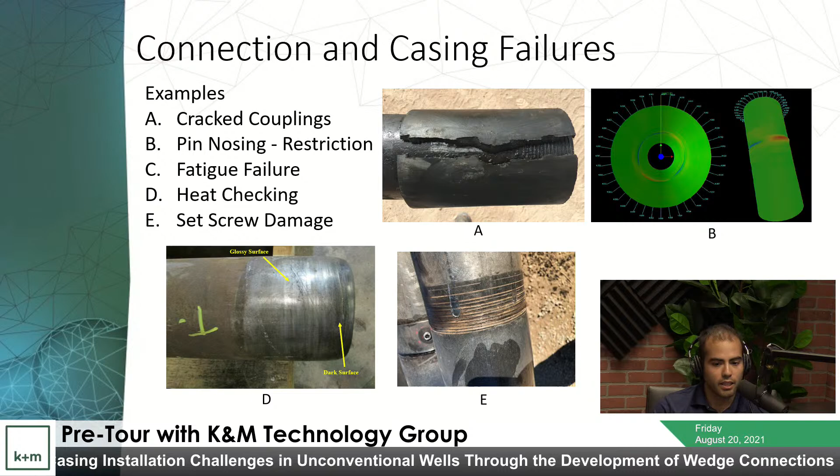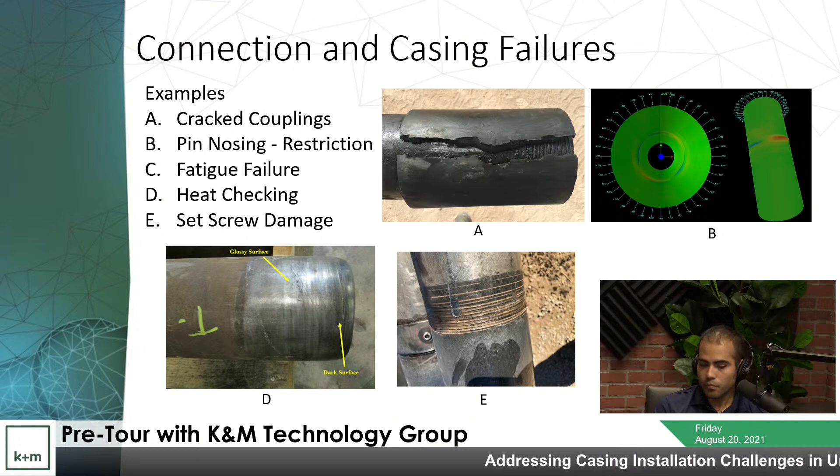If you really don't understand the fatigue limits of your connections and you start going through operations where you generate a high accumulation of fatigue damage, you can potentially see a failure of a connection. For instance, operators looking at rotation while cementing, or longer laterals requiring a significantly longer period of rotation, can end up accumulating a significant amount of fatigue, putting you in a poor position. So that's understanding the fatigue limits of the casing, but also understanding the fatigue environment.

And exactly, if we're only taking surveys every 90 feet, then you don't really have a good understanding of what the true dogleg severity is and how bad those bending stresses and fatigue stresses can be.

That's a good point, because if we're evaluating the anticipated fatigue for a specific trip-in schedule where an operator thinks they'll be able to run under specific parameters and then possibly rotate off bottom while cementing, if you don't understand that there might be a presence of a micro dogleg, say a 25 instead of an 18 that's picked up in the 90-foot survey, your estimation of fatigue is going to be severely off in comparison to if you really considered these micro doglegs.

And then you blame the casing manufacturer. It's also standard. I laugh because we've heard it.

So we have gone over our one hour, but there are a couple of topics that I think are really important that we still have not touched on. So I still want to cover those before we sign off. One of them is operating torque versus makeup torque. We need to cover that.

The other thing is, because we had a question in the chat that is really important also, since it's something we recommend against on a regular basis, is the risk of floating and rotating. You're rotating pipe that's basically dry reaming, and the risk of causing a casing failure is something we recommend against. So let's show the picture of the damaged pipe, and talk a little bit about the risk of rotating dry without pumping.

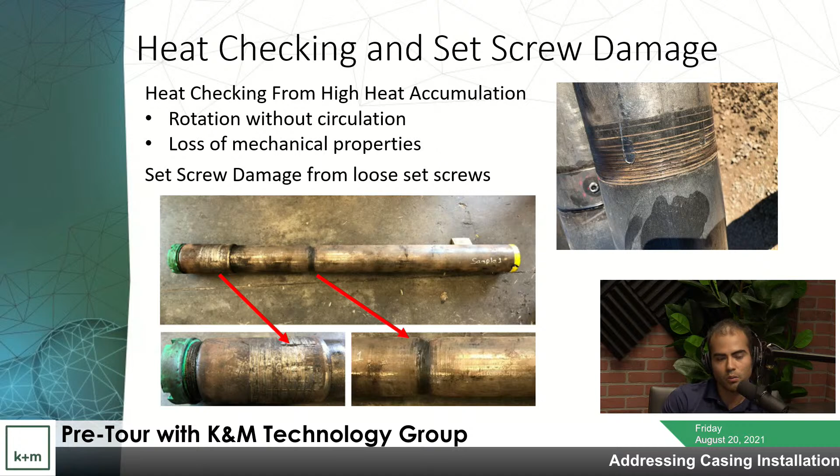It's all about your ROP, or rate of penetration, because if you're able to continue to progress, the chances of heat checking your pipe are pretty low. But if you're continuously in the same spot, that goes back to planning and ensuring you have enough torque and understand what it's going to take to reach bottom. If you don't understand that and you're continuously rotating without progressing, you may see this type of failure. So the short answer to the question in chat is, it is a valid concern.

It is a risk, but the mitigation is to not rotate while stationary. Make sure the pipe is constantly moving, so you're not accumulating heat over certain joints. Do your homework, take care of your well, and make sure you're ready for the job.

And if for whatever reason you can't get to bottom and you're going to spend a lot of time trying to get the pipe free, then it's probably worth either filling the casing and starting to circulate, or if you're running mud over air, breaking the hydraulic seal, filling up the casing, and maybe starting to circulate at that point.

That's kind of the perils of ERD drilling - some casing runs are one-way trips, and sometimes we're floating casing. If you can't float it and you have to circulate, the casing isn't going anywhere. So it highlights the need for good hole condition and focusing on that.

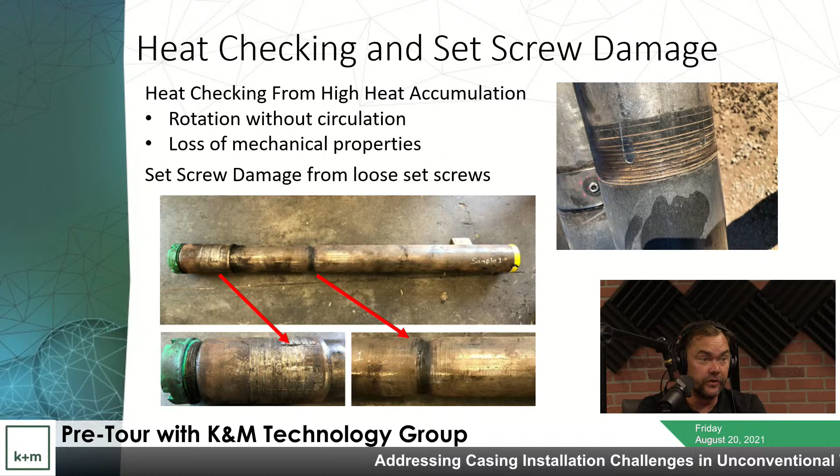Because a lot of times, if you fill up your casing, you're not going to be able to rotate it. So rotating without circulation is no longer a concern, because you can't rotate it - the torque goes too high. We've seen operators select a 400 series connection as a plan B. The intention is to float and reach bottom without having to rotate. In some cases, everything works out and you don't need to rotate. But for that one instance where you do have to rotate, if you have enough torque, you can possibly work your way down to bottom.

I do have another question about the published fatigue data - are these casing failures published, or is that internal material? It's published material. We published a paper through URTeC last year, presented during the virtual URTeC event. The paper number for those failure statistics is URTeC 2581, titled 'Maximizing Reliability, Well Integrity Statistics, and Risk Reduction Strategies.'

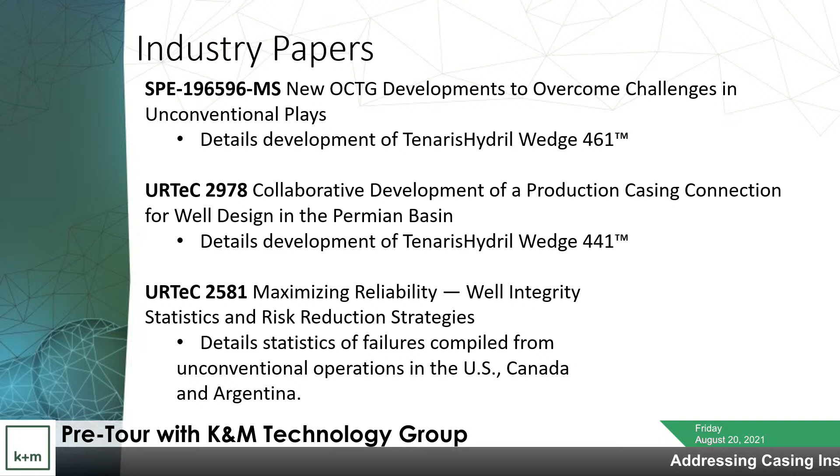Is that one of the papers you had? Yeah, if we put up the slide, we can see the papers that we think tie this presentation together. We have two papers regarding the development of connections, the 461 and the Wedge 441. The final paper on this list includes all the statistics regarding failures and risk reduction strategies. Some of the things we discuss here in terms of mitigating or minimizing the risk of these failures are discussed in detail there.

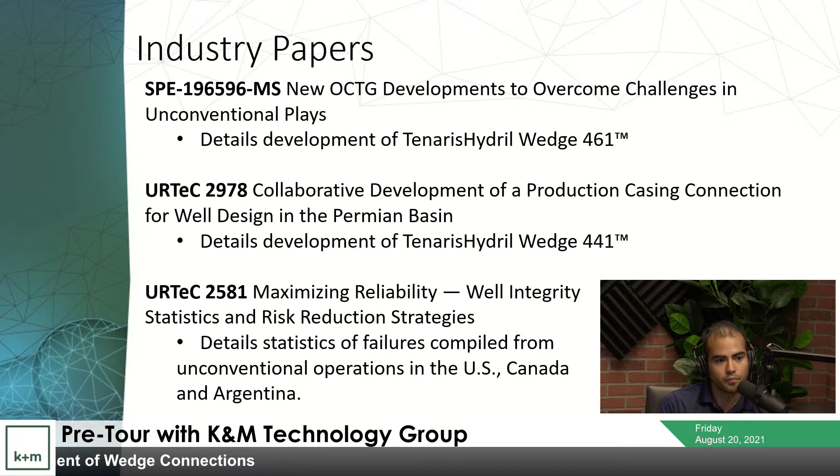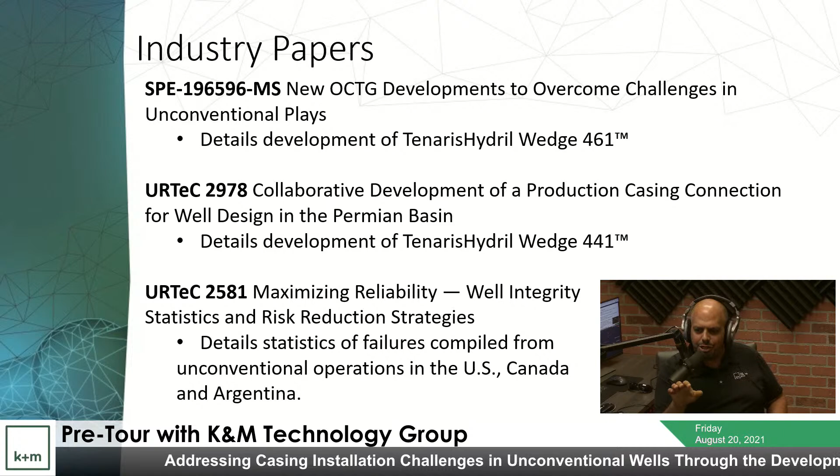Okay, excellent. The last thing I want to touch on before we leave is the wedge connection - it's one of the few connections where the published torque ratings on the spec sheet can be very confusing to people. There's minimum, maximum, optimal makeup torques, and then another line that says operating torque, yield torque, and usually buck-on torque.

Yeah, sure, so can we go through those? A lot of people are uncomfortable - whatever you make up something at surface, that's what they're going to set the stall limit to, and they don't want to exceed whatever they made it up to. So if you have an operating torque that's higher than your makeup torque, why even have a maximum makeup torque? Should you make it up to your operating torque?

And so maybe discuss that in a little bit more detail.

So the buck-on torques are torques that are specific to what we are applying at the mill, and this is specific to threaded and coupled connections only. You won't see a buck-on torque for an integral connection.

The makeup torques, the minimum, optimum, and maximum makeup torques, are torque values that we believe fully engage the threads and provide a level of sealability that we see in this testing, and also full structural performance in terms of tension, and also structural performance of internal pressure capacity, external pressure capacity, etc.

Then we have the operating torque, which is a torque value that you can consider as a value that has an applied safety factor to it, because it's a certain percentage below the yield torque, and the operating torque is the value that Tenaris is comfortable with the operator using as their dump value on the CRT, etc.